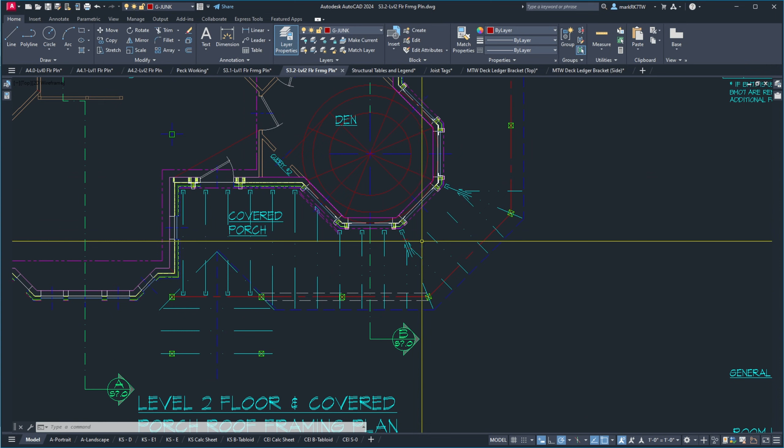But I'm looking at framing out the porch, the covered porch, and looking at doing it with trusses. And I've got this in a plan view here where you can see I've got at each of the ridge a truss. When I'm laying this out, I have to move these over slightly in this segment. These are on 24 centers. This middle one's a little more than 24, so I'll just do a little shift. I don't think it matters whether or not these really hit the same spot on that top portion.

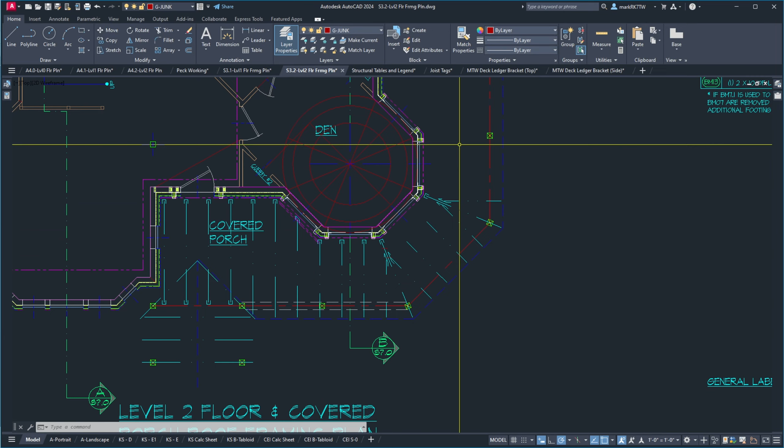But in 3D, got something that's a little interesting. And I'm looking to see what you guys feel as the builders and the framers. If you would like to see me take this portion, basically mirror it around to this side, so they'll come out this direction, continuing from here. Just this 24 on center on up with these trusses to match like that.

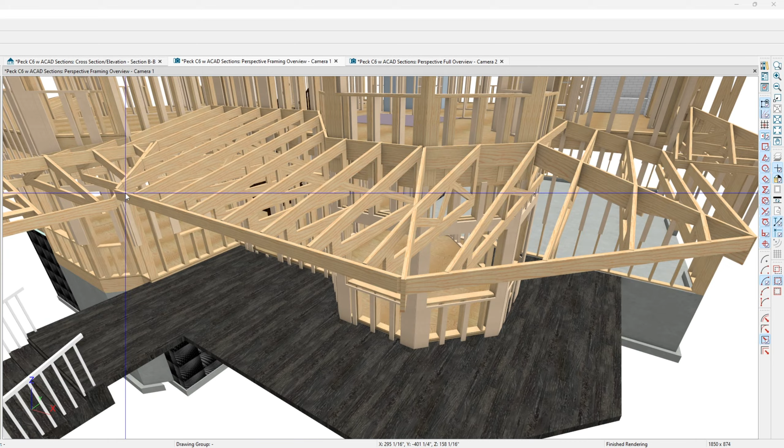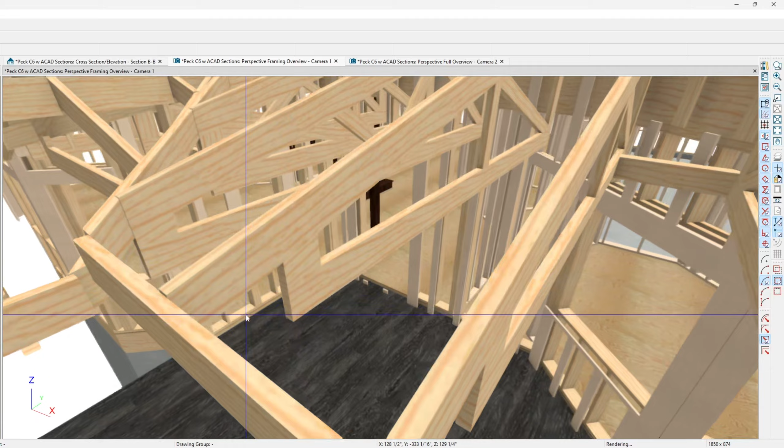Or if we look at this other side, this is an interesting way of framing it too. Just like with the other, I still do have just standard trusses over the entry piece here. Don't worry about these gaps and that sort of stuff. It's just I haven't got everything set up completely. In fact, it's even showing an energy heel on the covered porch, which of course we don't need. So those will be flattened out.

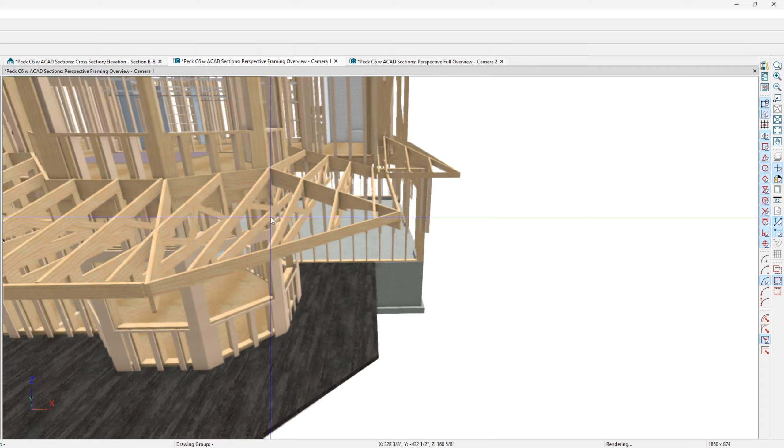But what was interesting is these are all straight through. And when we get over to this side, instead of turning to go with the fascia at 45 degrees and then turning it 90 to come over to this side, instead it's got parallel chord trusses at 24 on center. And just wanting some feedback on what you think would be easiest for you guys to frame.

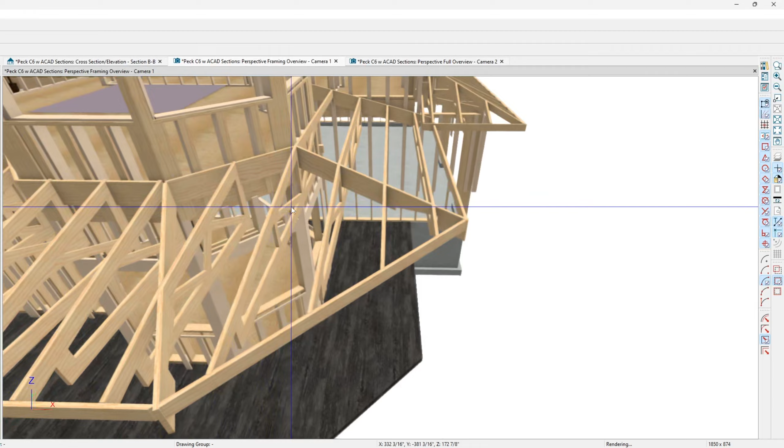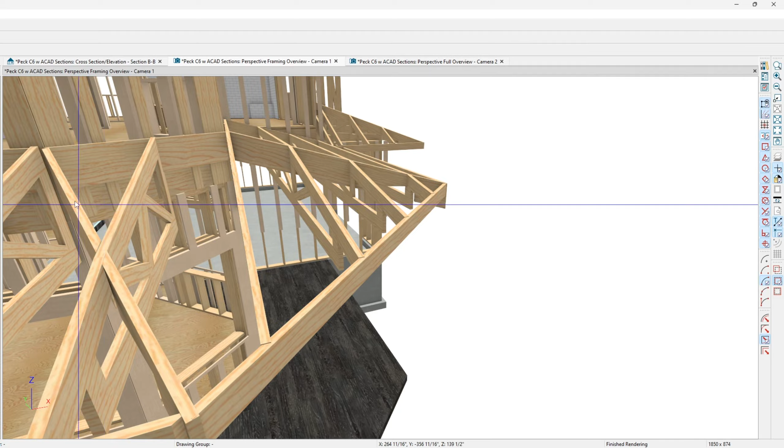Kind of looks really easy from here, but this is actually, as you can see, a flat plane until you get to that ridge. And so it's kind of deceiving here, as if you could keep the plywood running, but you can't, because you change to a different pitch here. Well, it's the same pitch, but at a different angle. And then again, it shifts here. So a little deceiving, but nonetheless interesting.

And wanted to get a take on what you guys felt would be the way you would prefer that I frame this out for you.